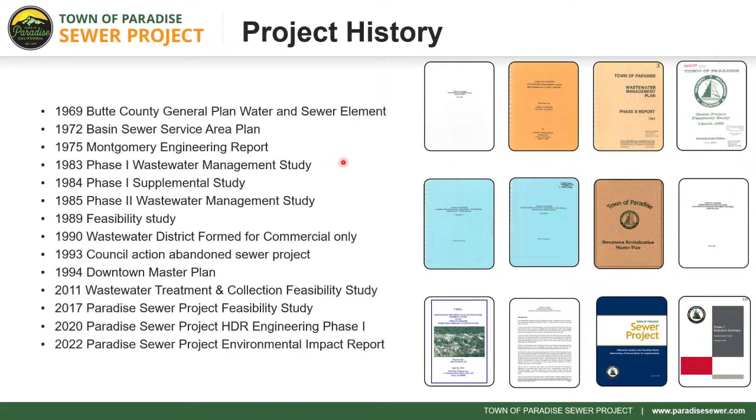We don't need to go over every single edition of the project, but post-Camp Fire in 2018, the Paradise Sewer Project is key to our recovery. Our objectives are still the same: improve groundwater quality and environmental conditions, restore affordable housing to Paradise, and remove a major barrier for commercial recovery. Those are the three pillars to this project, before the fire and moving forward in our recovery.

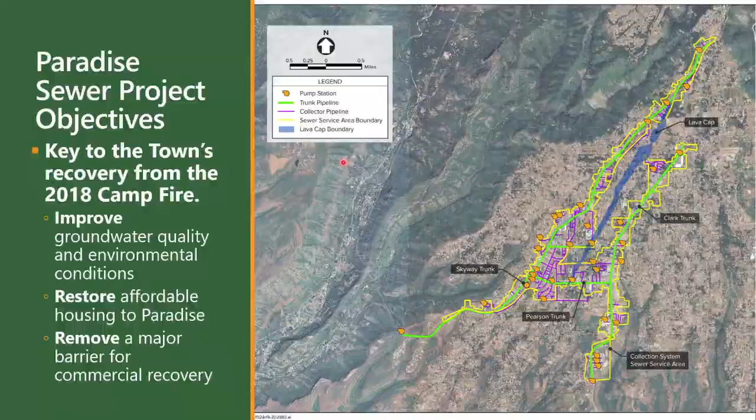Council member Mayor Crowder opened with a brief overview of our most recent efforts. He mentioned the 2017 study that recommended a regional and local option with a step system. But public feedback was given at that moment to move towards a full gravity, flush-and-forget approach, for lack of better words.

I mentioned the impacts of the 2018 Camp Fire, and that kicked off a new alternatives analysis in 2020. From there, we selected the regional option to partner with the City of Chico. We had a final adopted programmatic environmental impact report, which is imperative for the delivery of any type of capital project, let alone one this large.

We received $30 million for pre-construction phase work to design the project. We signed a contract with the City of Chico on how a regional project would be operated and governed. From there, we hired a progressive design-build team to scope out the project further, leveraging industry experts as well as design experts to deliver the project in the most efficient manner possible.

Late last year, we saw a drop-off in funding availability, and we were forced to accept that the state's contribution towards the project was not going to meet our original expectations. That, coupled with increased project costs, made the previous version of the project financially infeasible. So we had a special meeting on January 21st where you heard Paradise Town Council vote to direct the project towards a local option.

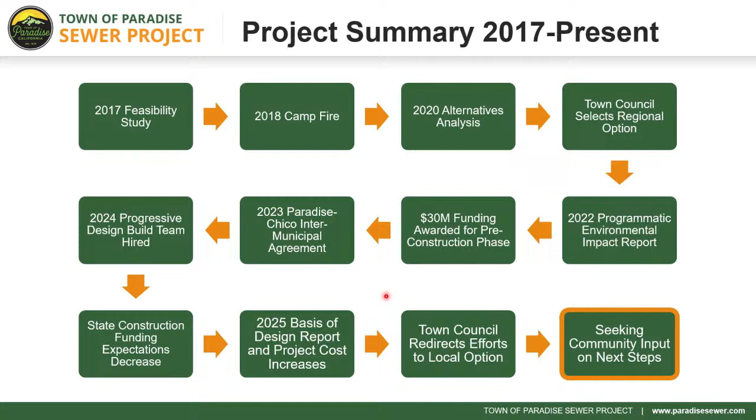One of the other factors decided out of that special meeting was the formation of the ad hoc committee, and you've met our council members participating on that committee. The purpose of that committee is to increase project momentum while keeping the public apprised of progress to find a fundable, permittable, scalable wastewater collection and treatment solution. Anything beyond that, we are absolutely open to on how to get that done.

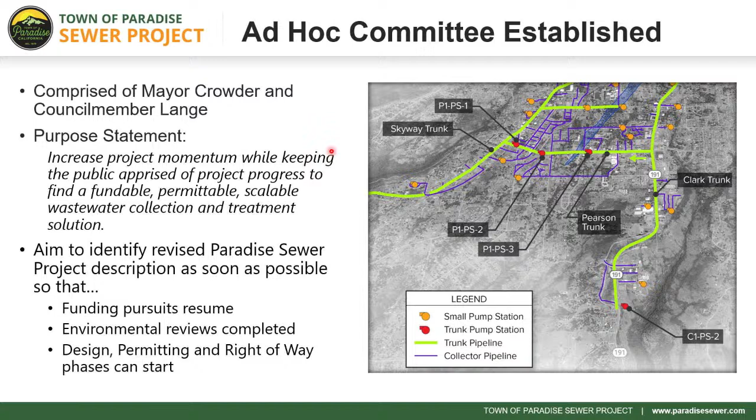Our aim is to identify a revised Paradise Sewer Project description as soon as possible so we can continue our funding pursuits. We can revalidate any environmental reviews as needed, and then get design, permitting, and right-of-way started and finished. So when it comes to moving forward, we heard about the project increases and lack of funding availability.

So we really do have to reset project expectations. With that in mind, in the town's 45-plus year history, this project has never been closer to a construction-ready state. And as you heard in the opening remarks, this is a key recovery project, a critical effort we are working on every single day, and we don't anticipate that changing anytime soon in any version of this project.

Regionalization has been abandoned, don't need to cover that again. The project must consider options to site a localized wastewater treatment facility and phase the originally planned sewer service area. That's a new reality, and I'll cover more about secured funding on the next slide. But as it lies today, we still do not have enough funding to construct a revised project. That's really key and a point of communication we want to make sure is known.

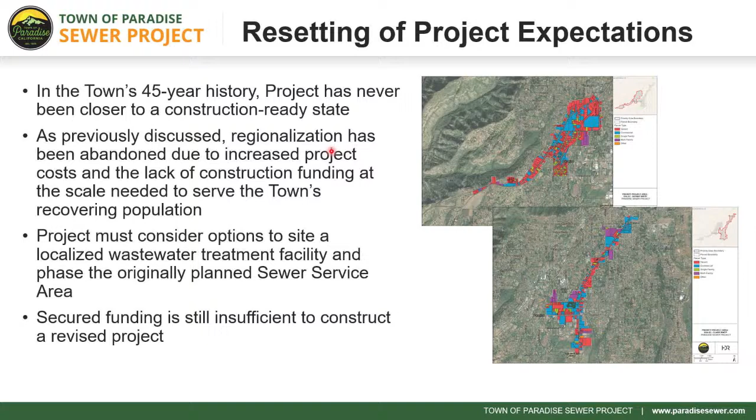When it comes to project funding, we have secured the $30 million Community Development Block Grant Disaster Recovery Funds, that's CDBG-DR, through planning and infrastructure. There's $15 million for planning, $15 million towards construction, but it might be able to reallocate to pre-construction phases if needed. We are so grateful for the $1.75 million congressionally directed spending made possible by Congressman LaMalfa. And as far as our funding prospects, we are reviewing a $50 million allocation through the U.S.

Army Corps of Engineers Section 219 program, which was also written in by Congressman LaMalfa. And then we are following leads for a $27 million State Water Board Division of Financial Assistance grant. And then we are aware that there is a $20 million low-interest loan option.

But as was the case in 2017 and every day since the fire, we understand that loans are really not of interest for the capital costs of the project. And so it has been our mission to really minimize that as much as possible to get this project funded entirely upfront through construction.

So at this time, when we looked forward about what our funding needs are moving into this localized treatment facility version of the project, we don't know what the target is. It is actually really dependent on nights like tonight, where we're going to hear from you about what you would like to see in what a treatment facility or a phased collection system might look like.

So that obviously is going to inform design decisions, which are going to inform cost. So with that, we are trying to identify what the version of the project will look like so that cost information and the funding pursuits, like I mentioned before, can continue.

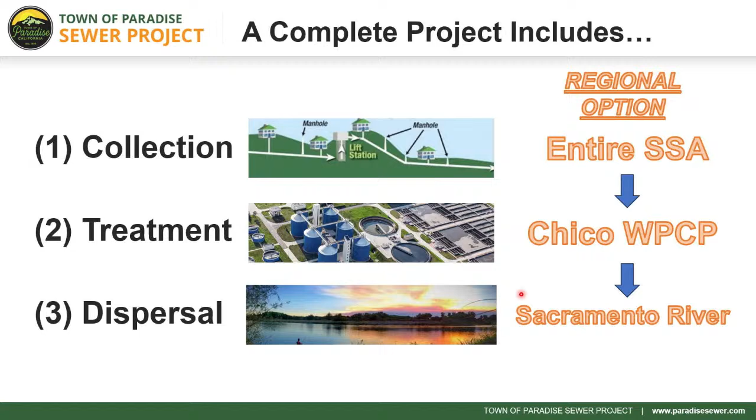So obviously, since we do not have a version of the Sacramento River here on the ridge, and we are moving away from the regional option, we have a lot to decide. One of which being the collection system.

You heard earlier, we are looking at a phased sewer service area, and again that ties into one of our polling questions out front. And then obviously in that collection system, we're going to look at a step versus a gravity system. But really key in addition is how are we going to treat and how are we going to disperse any effluent from the treatment process, and you'll hear more about that in a moment.

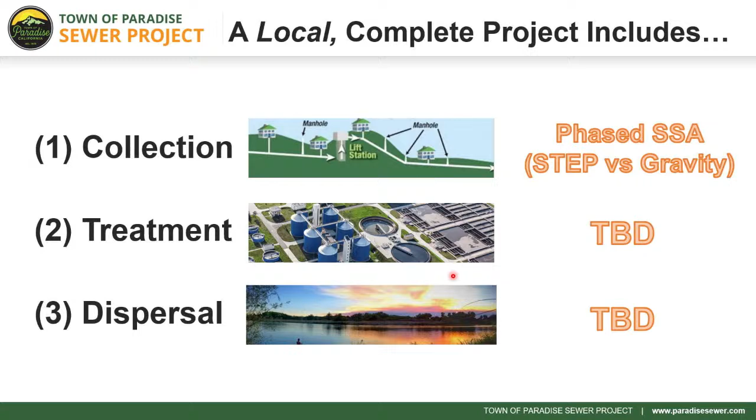As far as we do move forward, we're looking at the guardrails or parameters on how the project needs to move forward. We are open to all ideas that meet the objectives of you, the community, and we are seeking a solution which fits within funding availability and meets state standards.

So that's obviously very critical and something that the town does not have control over, what those standards are. But we are certainly aware there are numerous options that can do that, and so we're excited to hear more about that as we go forward.

Community and vendor input has been paramount for the ad hoc committee and the council at large, as opportunities for more community input. And so while we're grateful for your time tonight, this isn't the end. As needed, there could be additional public meetings. Obviously, we'll have updates at regular council meetings as well.

I also want to mention public comments are always welcomed. I have an email address here, but you're always welcome to come to Town Hall and meet with staff at the front desk and make appointments.

We've also issued a notice to vendors, and there's a packet on the table out front too, and this packet was also emailed to all Town of Paradise approved on-site operators. It's also been distributed to those that have come to public meetings and expressed interest about the project. And we're also doing proactive outreach to industry experts.

And what this packet really looks like is just an invitation for time to meet with staff and our project team to find out more about your idea and your preference of how this project should go forward. Printed invitations are available again here and online at ParadiseSewer.com. Again, I'll iterate, we really do want to meet with anyone who is interested in providing options that can meet key criteria. We are asking for these requests for invitations or applications to meet with us by March 21st, so we can keep this process and feasibility study moving.

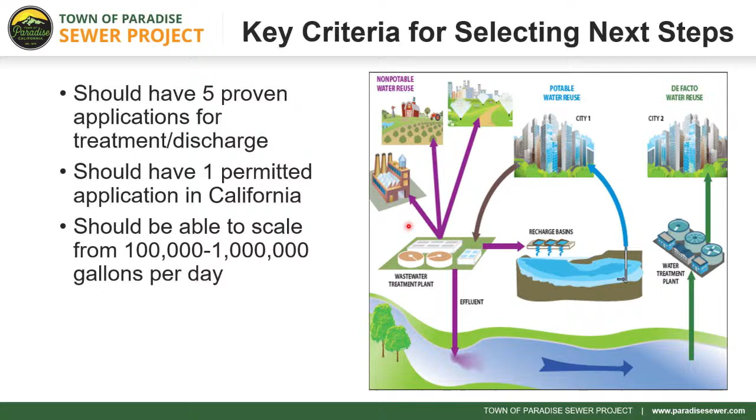Thank you, Mark. See if I can operate this thing. Yeah, I think I can operate this thing. There you go. All right. Yeah, so I was tasked to give you an overview of wastewater treatment. I called it Wastewater 101. Here, I can do it too. Okay, next. Okay, so I like to start at something simple.

What is in wastewater? What makes it up? Why do we want to treat it? So when you look at it, the first thing that's in there is water—over 99% of it is water. But then you have soluble and particulate matter.

To categorize things, because if you want to remove them, you want to put them in a kind of box so you can remove from this box and this box and this box. So the first box is whether it's particulate or soluble—in other words, is it something physical or something in solution?

The second category is the nature of that particle or compound. And the main ingredient here that we want to go after is the organics. On the right hand, you see all kinds of pictures of different organic compounds—regular foods, juices, and so on and so forth. Some of them appear in the wastewater as particulates, and some appear as soluble, like sugar. You put it in, it dissolves, so you need to get it out of the water.

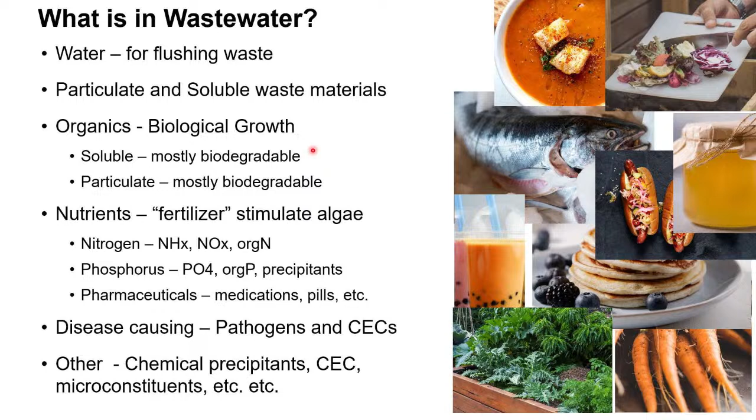If you think of it, it's pretty simple when you think about it. How do we remove a particulate? There's two fundamental ways. The first one is by exclusion, like a screen. On the left-hand side, you see there's a screen. It has a grid on it, and it has openings. There's a fine screen that's behind the coarse supporting grid. All the water flushes through it, and anything that's bigger than the screen opening is removed. So there we remove particles and even rags and things like that.

The other way is to let it settle to the floor of a tank. So you put it in a tank, and everything that's heavy, the particles, will settle on the floor. Then you've removed it, and on top is mostly soluble material. There's always little particles that never settle, so you have to deal with them also. You can put a physical barrier like a filtration cloth. I'll show you a device where the water flows through that carpet-like material to the inside, and in doing so, the carpet excludes the particles, and you get pretty clean water going out through the inside. The advantage of soluble compounds is it's very easy to remove them biologically.

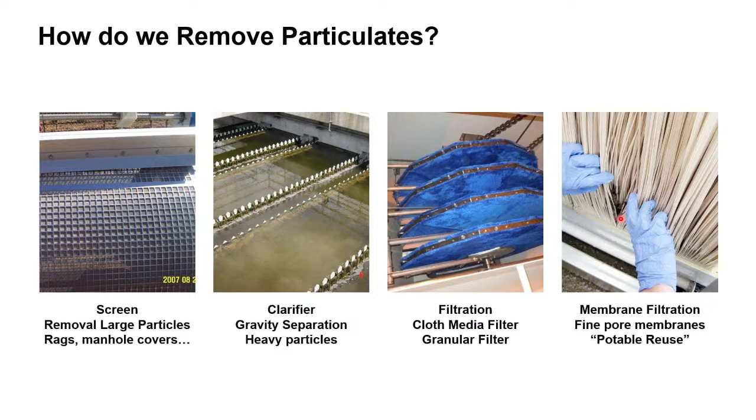If you have a particle, first you need enzymes to break it down so it's soluble, and then organisms can remove it and clean up the water for you. So taking out the particles is important. On the right-hand side is kind of the ultimate today: using membranes. Maybe some of you have point-of-use devices in your home to clean the water from the tap, using these membranes as a very exclusionary filter to take all the particles out.

How do you remove soluble organics? Well, you can have soluble and particulate. Right now, many septic tanks in this community have water going out of them. In that water, you often have a lot of soluble organics still going out, and that gets oxidized once it hits the infiltration system. Oxygen comes in, and bacteria will break it down.

If you want something a little more mechanical, facultative oxidation ponds are large basins where you keep the water for days and days, like over 60 days in a series of ponds. Over that period of time, slow natural processes will break down the organics and take it away.

But you can also build a mechanical plant. In this third option, you build a basin, and inside the basin you concentrate bacteria and keep them there. As the bacteria see the organics, they'll remove and oxidize it. In the process, just like we eat food and breathe—the breath gives you oxygen and the food gives you organics to break down for energy—it's the same process, but here we use bacteria to do that. You can see the fizzing on the surface of the water; it's from bubbling air, like in a fish aquarium, used to produce oxygen for the fish, or in our case, for the bacteria.

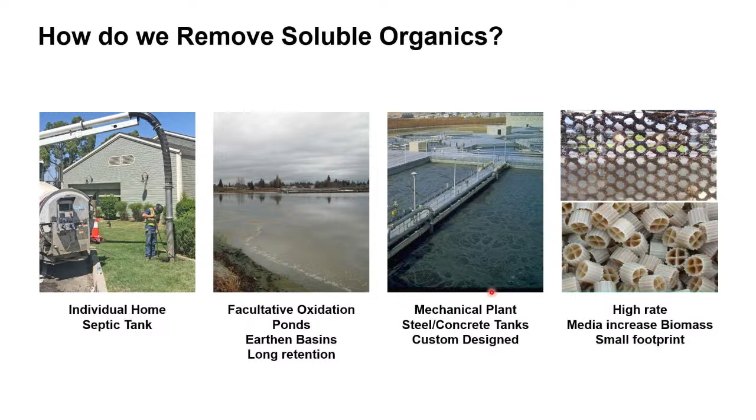Nutrients are a little more tricky, the next step beyond this. They're tricky because you have to follow the chemistry from ammonia that comes from the human body: you oxidize it to nitrate, and denitrify it to nitrogen gas, which goes up in the air. It's a complicated process, and you build a mechanical plant and send the flow through different zones. This picture shows a mechanical treatment plant.

On the left-hand side, you can see the white surface is bubbles coming to the top—that's air, we're bubbling air through there. On the other side, there's no air. We need a zero-air condition, because then the bacteria will use this nitrate and break it down into nitrogen gas. So you trick the bacteria, you grow a special bacteria to do that for you.

In your case, nitrate could be a limiting factor. Usually, for normal discharges, it's just BOD and suspended solids. But when you go on land application, you have to be watchful for nitrogen, because you don't want it to go into the ground and pollute it, causing a problem. Sometimes we add chemicals, and the more mechanical the basins, you can see equipment, mixers, aerators, and all kinds of stuff inside.

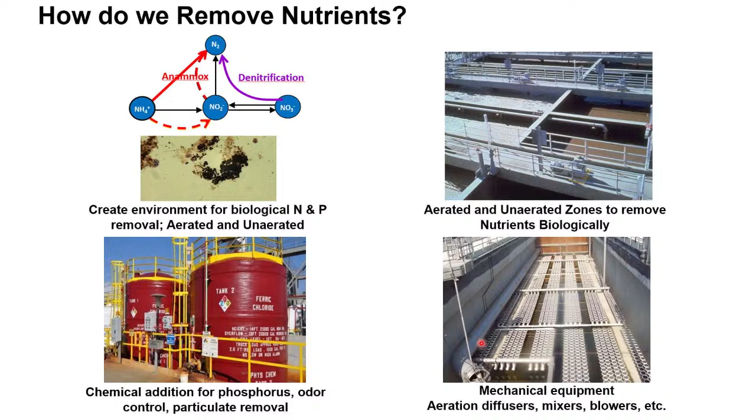What about pathogens? These are disease-causing organisms, and we want to get rid of them. Chlorine is a favorite, used all over the country. UV is another option. These two are basically the mainstream options for disinfecting the water, so you don't have any pathogens to cause disease.

Chlorination requires a big tank to hold the water. UV takes a small tank, because it uses very high-intensity lights to kill the bacteria. You can also use membranes, as shown here—very fine membranes that exclude the organisms. If you're crazy like me, you can drink the water in the end if it's really clean.

This is in San Diego. They have a direct potable reuse demonstration plant. So, next.

But I don't have any nasty habits because of it.

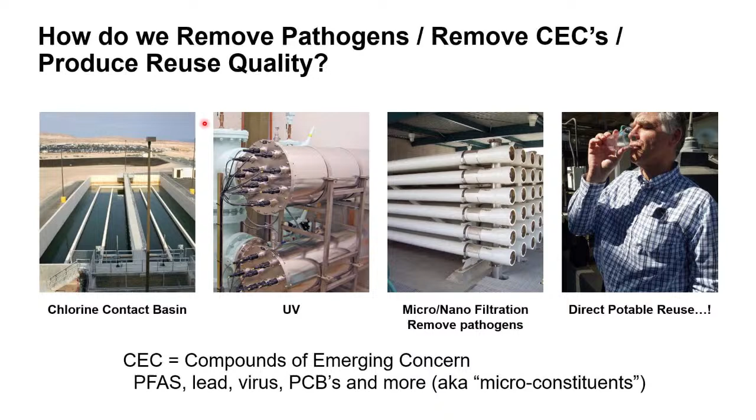Okay, so that's the liquid side. But there's also the solid side, because the solids settle down and you need to do something with them. The solids you can put in a lagoon, like this one shows, a large storage lagoon. Maybe put some floating aerators on to put a cap of oxygen on top, so you don't get odors coming from the solid storage. Mechanically, you can build a digester, and then dewater it and even pasteurize the solids. So the solids become an important thing that we cannot neglect, and we'll talk about that.

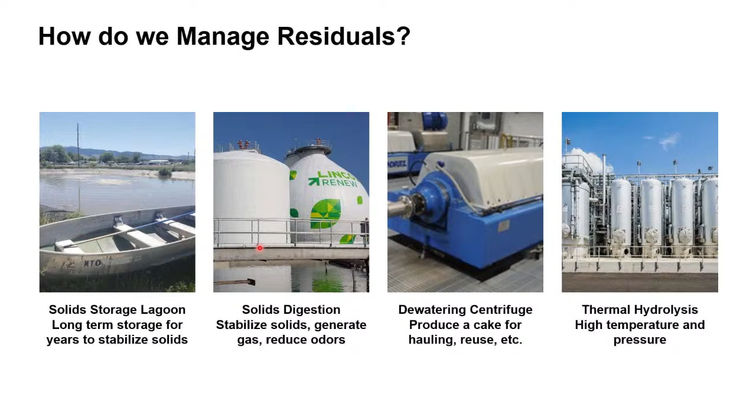Next. Okay, so how can we approach it? That's kind of the fundamental processes you can use. What are the different approaches? In the big picture, there's kind of two central themes, and both are in play here, I think.

Decentralized and centralized. Decentralized meaning individual systems, like an individual's septic tank, or even a septic tank effluent pumping system where you collect the effluent and pump it to a common location for disposal. You still have to deal with the residuals from that tank, so keep that in mind.

Centralized systems are just treatment plants. So these are what you were thinking of previously, to collect all the wastewater and send it down to Chico for disposal there. Next.

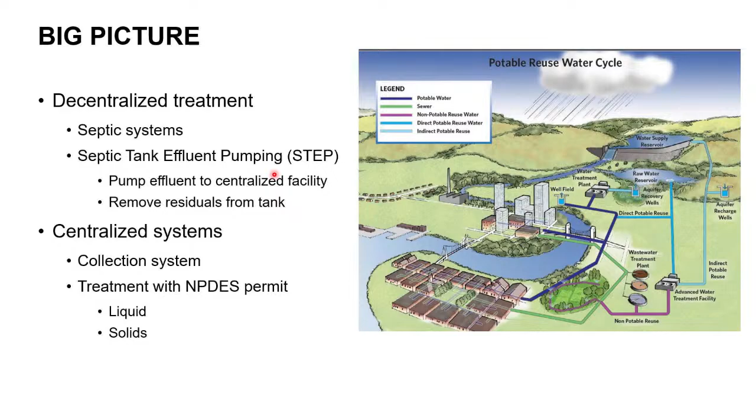So, just another kind of illustration. This is kind of the options. So you have individual homes with septic tanks and leachfield. This is my cartoon. Or you can put them together and have a STEP-type system where you collect the overflows and then deal with the solids by cleaning out the septic tank or some other way. Communities send everything liquid to a main treatment plant, with the solids then going to disposal through a landfill or ag field or something like that.

Next. In all of this, the governing force is the NPDES permit that contains the requirements you have to meet to put the water in certain places. So the stream you go into will determine what you can put into it. And that's a whole analysis that EPA does, and you'll have input into that, whether you go to the river, reuse, or land application.

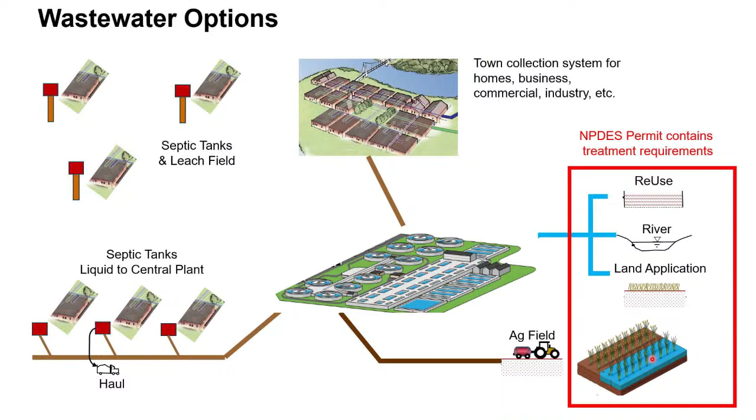And same with the solids. If you take the solids out, you can apply them, put them in a landfill or some other location. Next. And here's an example of some preliminary inquiries we've done for potential application here for land discharging and for surface water river discharging.

Surface water could use general permit conditions, which is just BOD and TSS limited. And then for land application, you also have a BOD, TSS limit, but then you have this nitrogen requirement. So for land application, this is what I was talking about earlier, that we have nitrogen, so we'll have to remove the nitrogen in those discharges.

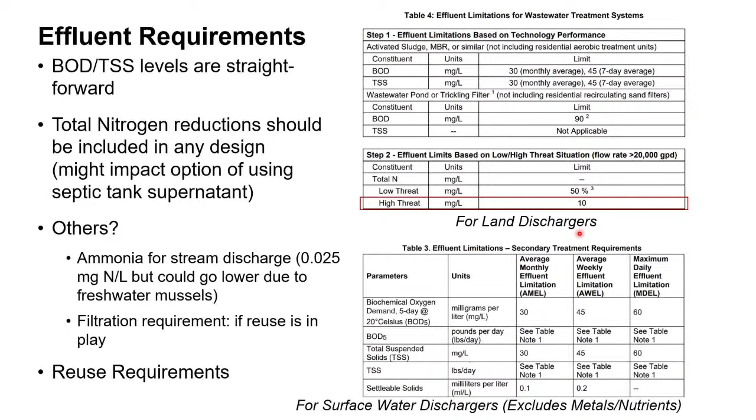So when we look at the centralized treatment systems, what would they look like? I drew up some cartoon pictures here. They look complicated, but they really are not. So I go from simple to highly mechanical. This is least mechanical, this is most mechanical.

And so if we look at the lagoons, for example, we have screens and grit that take out the coarse particles right up front. You put a screen, like I showed you, and a grit chamber, you settle a tank, and all the heavy sand will go to the floor. Then you have a series of lagoons, and these lagoons get oxygen from the air, you disinfect, and then you go out into your receiving water. The solids will accumulate in these lagoons. You pull them out, you may store them, maybe bring in a dewatering device, and then go to a landfill or something like that. So some device here.

Now, in all of these, I'm going to use the same front end and the same tail, but I'm going to change the middle, the heart of the process, to put it in those terms. The next one is an aerated lagoon. In this case, what you do is take a lagoon and put mechanical air in it, which gives you more oxygen and a higher rate. So bacteria works faster, and by doing so, you make the footprint smaller. I'll show you an example in a minute.

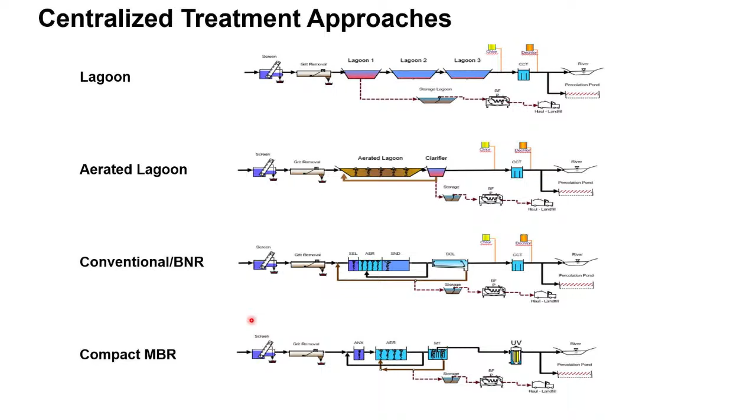Next, so here's some examples. And then I calculated some footprints here just to give you an idea of what it is.

So the lagoons, the natural lagoons where I don't aerate anything, I just let it flow through, let oxygen come through. I told you, like 60 plus days to hold that water. It turns out in my little calculation, just to get an example, these are just order of magnitude numbers, but you can see it's very big, 70 acres, 50 acres, something like that. That is huge, and probably not easy to find around here, I would imagine.

The second one is to use an aerated lagoon. So now you put physical aerators in, it shrinks the footprint. It's a very similar process to the first one, except we've mechanized the heart of the process. And you can see now we go nearly 10 times, more than 10 times smaller for this 1 MGD, 5 acres to put this. And I'll show you the 5 acres in an example in a minute.

Conventional, these are now, you can see a fully mechanical plant where we build boxes side by side, so we make the sides compact, get all the different equipment in there to accelerate the process, intensify with more bacteria inside it so that the process is faster, and it makes the footprint even smaller.

And then the last one I'll show you is this one. This is the membrane bioreactor. What this does is for that last step, you grow all the bacteria, you see they live in this big tank, and then you need to settle them out or exclude them to clean up.

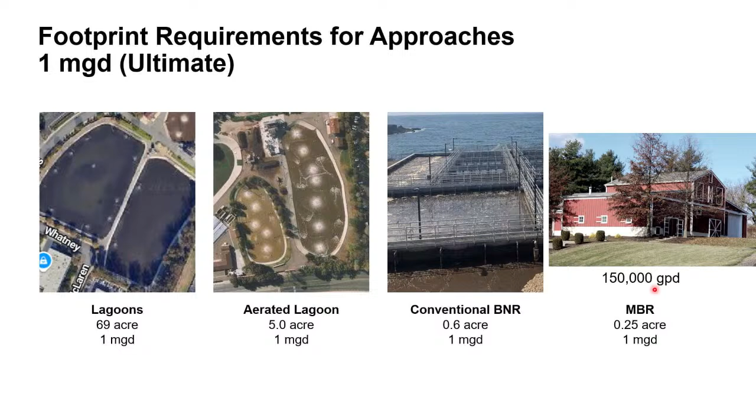Okay, so let's look at some examples quickly. Here are some high-rate lagoons. This is Los Alisos, in Southern California, in South Los Angeles. This is actually a 5.5 MGD facility.

And you can see here the aerated lagoon, followed by others. This picture is maybe a little bit bigger, better to see the full footprint. So while I was showing you this kind of footprint earlier, now I show you the full thing. Now there's these other processes we talked about, the screening and the grit up front, and the filtration and others at the end. Just for a sense of size, you can see this is the heart of the project, all these lagoons. This building here, that little thing there, that's the disinfection at the end. And up here in a little building somewhere is the first part. So they're very small compared to the lagoon. Now as the main thing shrinks, this gets a little bit bigger.

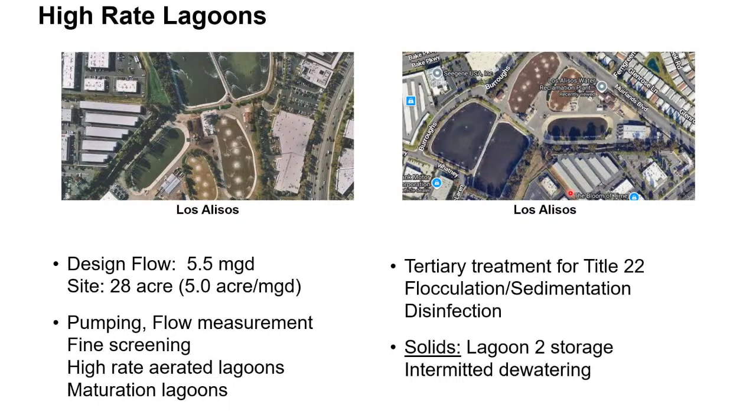Next one. So this is, and then we go into conventional BNR. Now you can see kind of the whole structure empty here, side by side, wall to wall, very compact layout.

And then in this case, also this is Colfax, this is Fort Bragg. In Colfax, we have a 300,000 gallon per day plant on average. But they have a bunch of lagoons on the end. You can see here's one lagoon, there's a few others. They use those lagoons actually for equalization. They were existing, and so they use them for equalization. So they don't have to treat for 1 MGD because they just put it in the lagoon and wait, and then they bring the water back later.

Same with Fort Bragg. Next one.

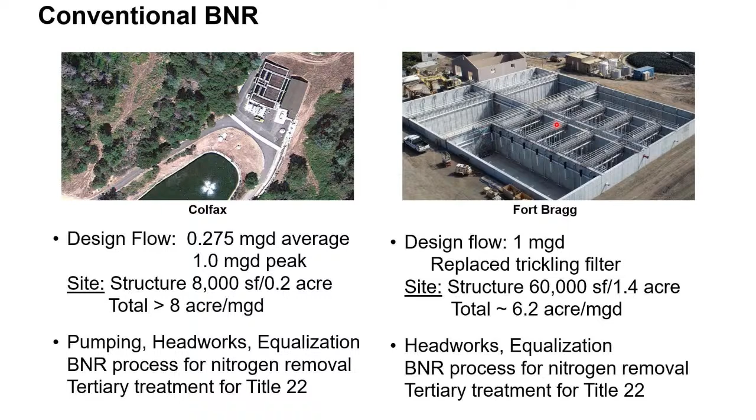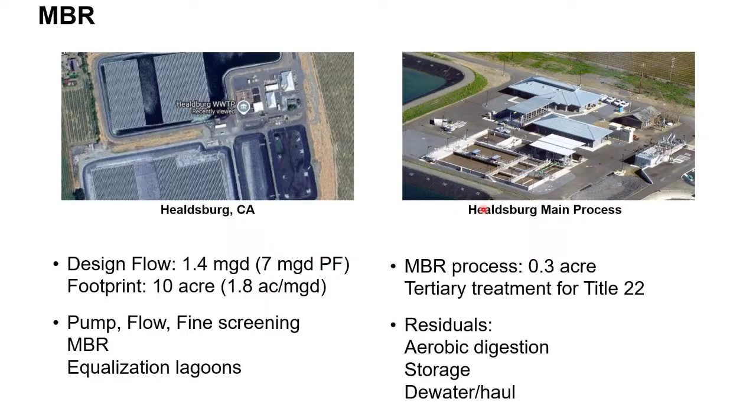Next. Okay, so that's it. We're all experts now. I'll sign your certificate as you give it. Thank you. Thank you so much, JB.

We appreciate you giving the brief presentation, and then, as I mentioned, we'll have a public comment period. The goal is to try and find a balance between Q&A and public comments, so we'll do our best to address everything we can in the amount of time we have, making sure everybody has a chance to be heard. So, speaking of which, we have a survey for those here in person and those watching online.

There are options for you. Out front, we have a couple of boards with some dots you can put stickers on for your preference. And then, active online right now, if you go to our website at paradisesewer.com, which has been recently revamped and relaunched with all of the changes, you'll see on the left side of the screen a little box on the banner that says 'We want your input, take our survey.' The vendor invitation application for the appointments is right here on the right as well.

So when it comes to the survey, if not everyone stays for the entire public comment period, before you leave, please help us and make your opinion known on these two really basic questions that will help guide and inform us about the priorities of the project.

As we understand that we need to phase the sewer service area, we are curious on the public's feedback on what area would be your preference to be served within the first phase. Option one would be the Skyway and downtown corridors, or option two could be the Clark Road corridor. And certainly I want to note here, as we mentioned, we are looking to phase it, and the amount of funding available needs to match what we build. So this representation is not a commitment to construct because the actual final first phase hasn't even been developed.